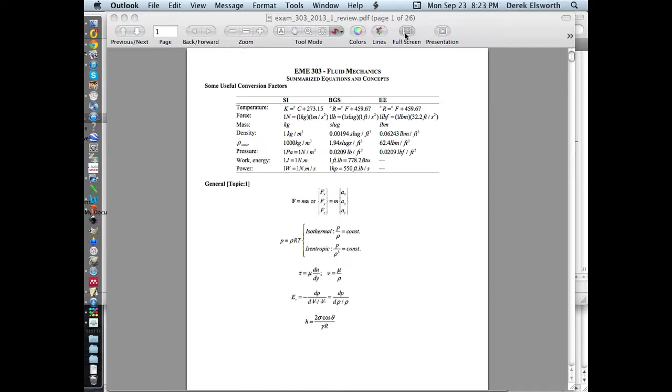Are we given that equation sheet, or do we have to bring our own? No, you're not given any equation sheet. What you need to bring is what you want to bring. So should we have conversion factors on our cheat sheet?

There will be no units other than SI. I would expect that you know this for the exam. So you should know what a Pascal and a meganewton, a Newton per meter squared are. Work energy you don't need to know yet. You should know what density is.

No, I don't think you need conversions. But you should know newtons per meter and how to dimensionalize things like you did in your first chapter, in terms of mass, length, and time units.

The test will all be in SI. Some tests I noticed today have been in English units or BGS. This test will all be in SI. SI only. That's all we've used in class so far. Period.

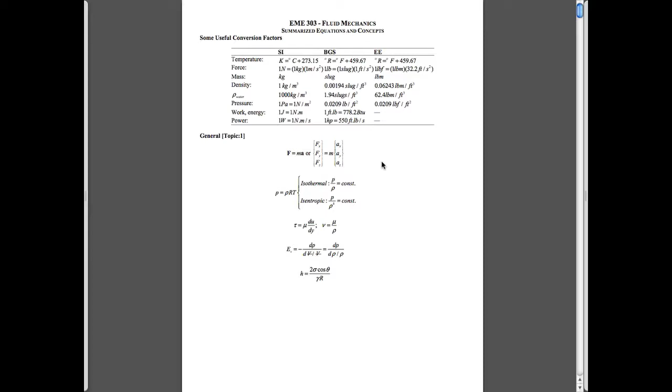So I'm never quite sure how to do this, but I'll go through this. Well, you have all of these. So, in terms of any other questions before we get rolling?

So this is actually marked up from last year. I didn't realize that. I use this program called Skim, which allows me to mark up as we go through. If you store it as a PDF and look at it in a regular PDF viewer, it doesn't actually store the markup, or it doesn't show the markup. But when you show it in Skim again, it shows it.

So these are my markups from a year ago. It's not particularly a specific review sheet to this exam, but it does cover everything, all the concepts you need. They're relatively straightforward. So, ideal gas law, you know in terms of...

gas pressure, temperature, gas constant — this being the specific gas constant for a particular gas, this being the universal gas constant and the molar mass, and this being the density. Density, of course, is mass per unit volume, uppercase M per unit volume, just by definition, which leads to some of our expressions.

Remember always — I can't believe if you're taking thermo now you don't remember — that this is absolute fluid pressure, this is absolute temperature. Otherwise you'll get the results wrong, so you have to remember about doing that.

And if you look at any particular gas, you can merely write this expression as pressure equals density times gas constant times temperature.

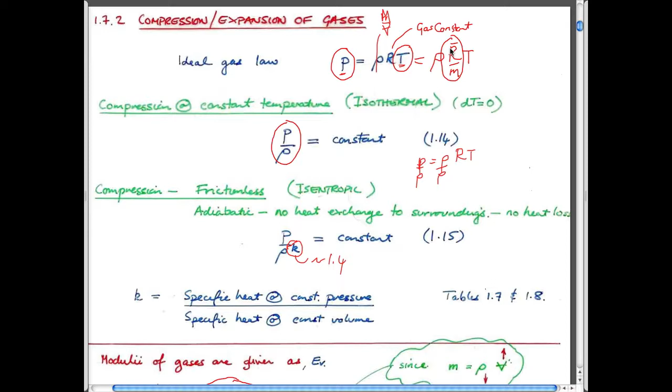Compressibility, well, we used it in a variety of different things. It's really just a term. It's useful to us because we used it in defining acoustic wave speeds, but we haven't really used it for anything other than that.

By definition, it's the change in volume over a unit volume with a change of pressure. The negative sign is just the fact that if you increase the pressure, the volume goes down. So just to keep this constant, a positive unit or a positive dimension, there's a negative in there. It's exactly the same as the change in pressure eliciting a change in density—they're exactly the same expressions.

The compressibility is just the reciprocal of the modulus. It's the same as electrical conductivity being 1 over the reciprocal of resistivity, electrical resistivity. So compressibility, and this is bulk modulus, I guess, as we defined it, if you want terms attached to this.

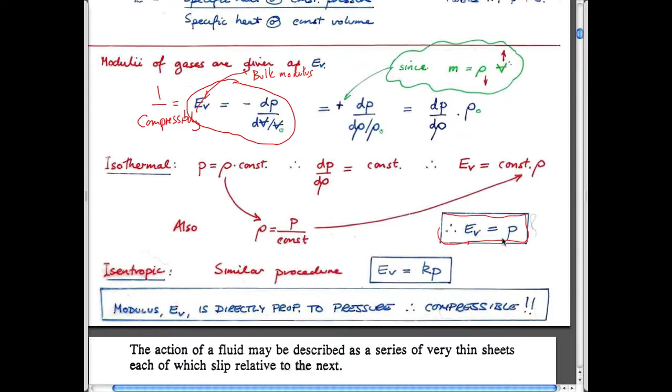A kind of interesting quirk, don't think you need it in the test, but don't turn off: the modulus of a gas at relatively low pressures, actually up to quite high pressures, is equal to the gas pressure. So at 100 kPa that we're sitting at right now, the modulus of air is 100 kPa. So interesting quirk.

So gas law is an important law. You will need gas law, I mentioned that.

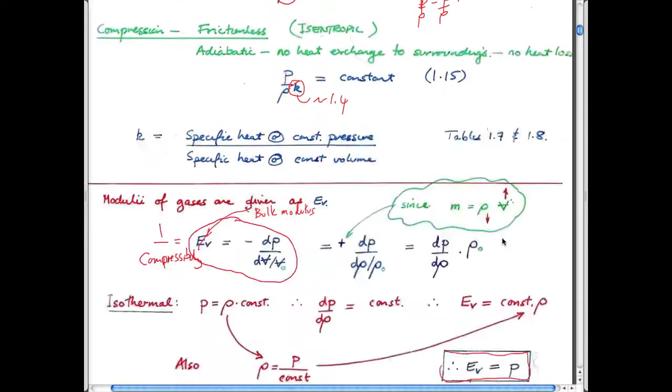Viscosity is a way to be able to relate forces that you apply to bodies that are moving to the velocity at which they're going. I think you've done some examples. It's really just Newton's law of viscosity—it's a straightforward law.

All it says is that the shear stress that you apply in a fluid is equal to some constant, which is the dynamic viscosity, which in SI units has units of Pascal seconds. Shear stress is in pascals.

And the shear stress is proportional to a kind of shearing rate, or a velocity with space. The easiest way to think of this is a derivative, but it's also just the change in velocity as you go from one location to another.

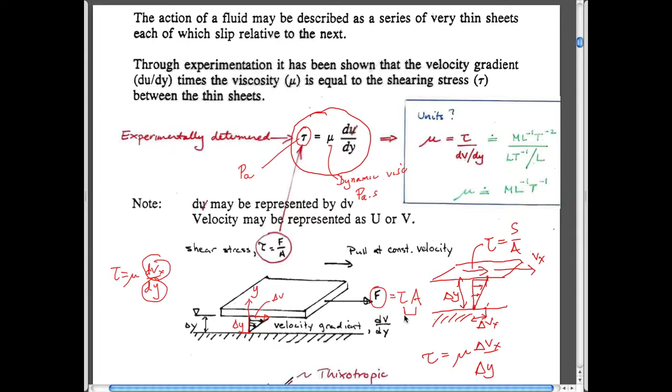And so that's another expression. So: ideal gas law, Newton's law of viscosity. We will only deal in this class with Newtonian fluids, which are these ones here.

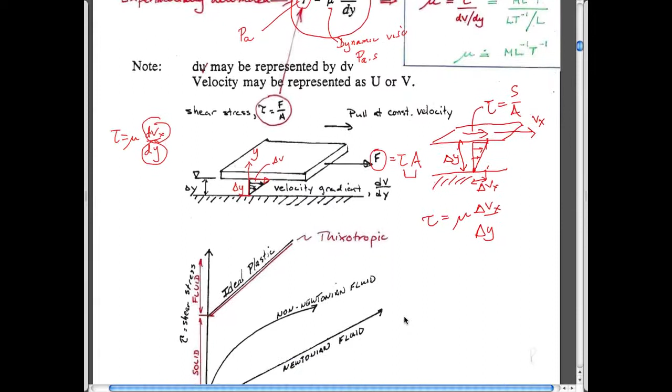Newtonian fluids basically say that if you increase the shear, if you double the shearing rate—so if you start off with a shearing rate of some magnitude, you'll have to apply a specific shear stress to move it, a certain force. If you double that shearing rate, then you have to apply double the force.

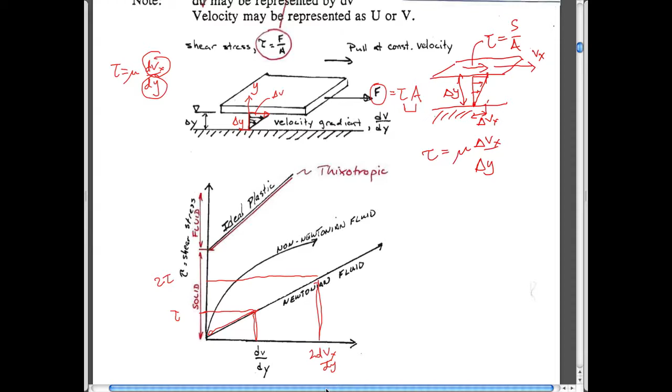That's basically the definition of a Newtonian fluid. So this is 2 dvx/dy—it's just double the amount. So that's the definition of a Newtonian fluid: ideal gas law, Newton's law of viscosity and how to use it, interfacial tension.

That's interesting. So yeah, I didn't know I was so generous. I think that question was actually on the test last year, so you might check that. I'm not sure.

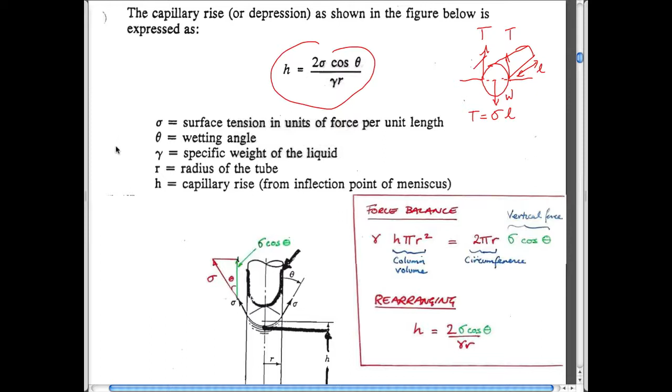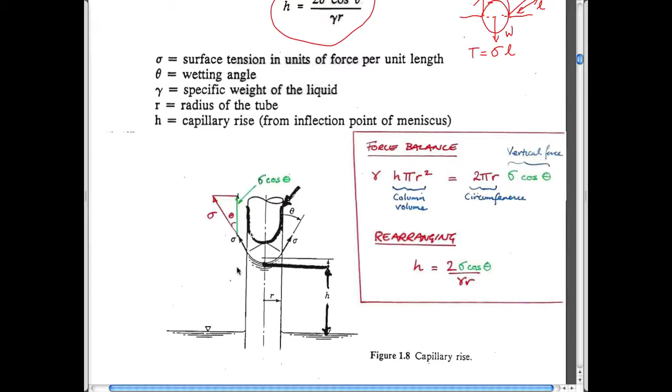Interfacial tension is the third of our major properties that we've dealt with. We looked at the behavior of a capillary and derived an expression related to that. You might have looked at some other ones in your assignments. I can't remember, and I don't really know what your assignments are, so I haven't looked through the book to pull out questions from those. That's just another data point for you, I guess.

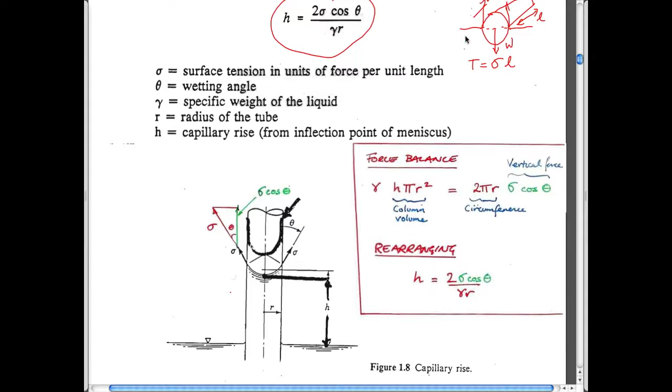If you want to look at the roles of interfacial tension, it's applied where there's a free surface between a liquid and a gas, and also a solid. So either last year or two years ago, the question was: what's the maximum diameter of a needle that can float on water, if it's made of steel, copper, or some other material?

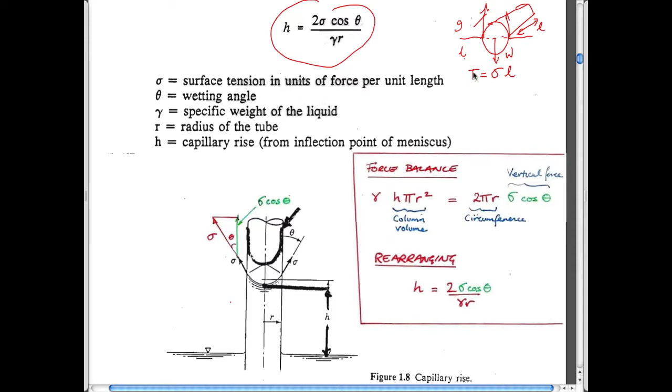You write the free body diagram for it, which gives the forces acting upward, in this case T and T on each side. They're applied along the length, so this is newtons per meter, and the length is in meters, so in terms of units this is newtons. There's two of them acting upward, and the only component acting down is the weight of the solid. The question said to ignore buoyancy, so you don't have to worry about half of it being submerged.

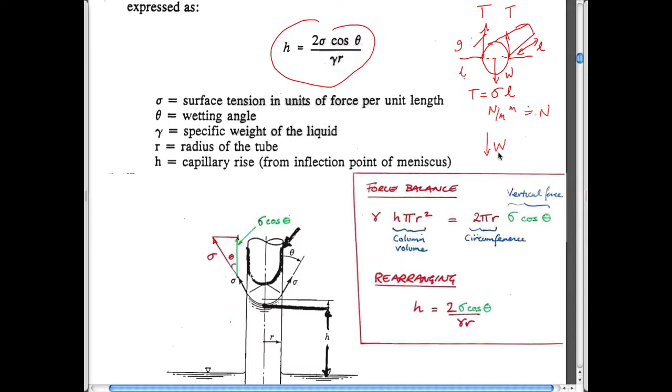We did an example for a capillary tube, basically the same idea. We wanted to cut this off at this point here. The reason we can do that, even though we haven't defined it yet, is that if you can go from one point to another in the fluid at exactly the same elevation along that pathway, then the pressure here has to equal the pressure here, by definition.

So you can just cut the tube off at the bottom and do a nice free body diagram to calculate the behavior. The idea is the weight of this, which is volume times unit weight of the fluid, balances the forces pulling up, which equal interfacial tension times circumference. You can check that each of these are forces, balance them against each other, and define the behavior in terms of this particular radius or diameter. Straightforward - well, straightforward to me.

Typically you could think of this axis as an angle, but the simplest case is if it's parallel to the glass you have, which is much easier. This expression is exactly what comes out of that, and if theta equals 0, this term just equals 1 and drops out. So we have a relationship between height rise and interfacial tension, which we talked about in class: interfacial tension is higher, it rises higher; radius of the tube gets smaller, it rises higher. All things you kind of know intuitively, but now with numbers on it.

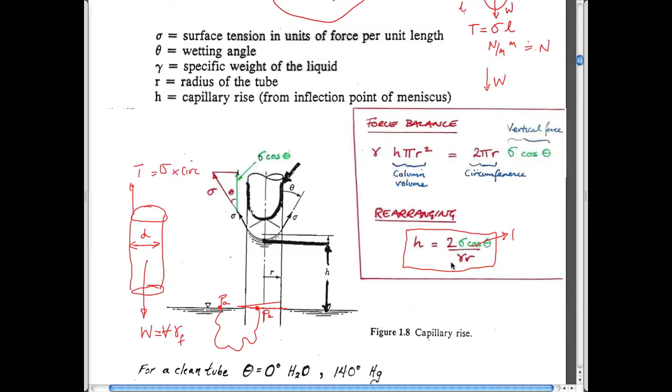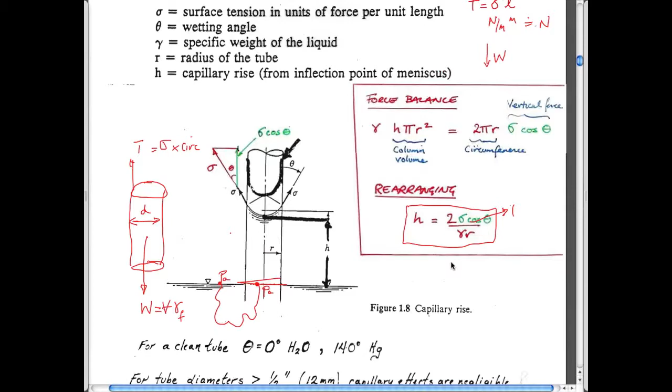Okay, so a question on fluid properties - those are the principal fluid properties, I think: ideal gas law, viscosity, and interfacial tension. So know how to use those. I won't go through these now because we'll cover them when we talk about things.

Yeah, I apologize for having these scribbles on here. I didn't choose that, but this is the first time I opened it up. So remember the fact that we always choose our positive z direction upwards.

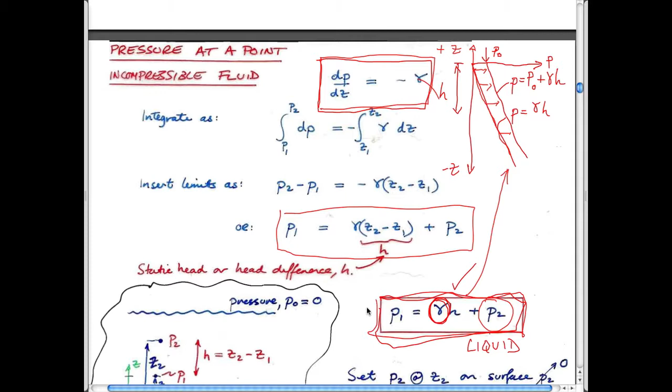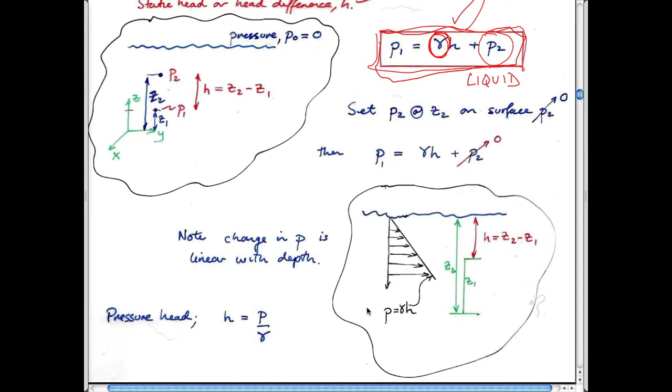I think if you've got this far in your homework assignments, you certainly know how to do that. Everyone okay? It gets a bit more complicated when you deal with gases.

There isn't a question for which you need this page of formula, I don't think. So don't switch off, though. We made the point that this expression is valid everywhere, always, liquids or gases. But for gases, because this isn't constant, it changes.

Unit weight, of course, is equal to density times gravity. And density is a function of pressure. Not trying to confuse you, this just means it's a function of pressure.

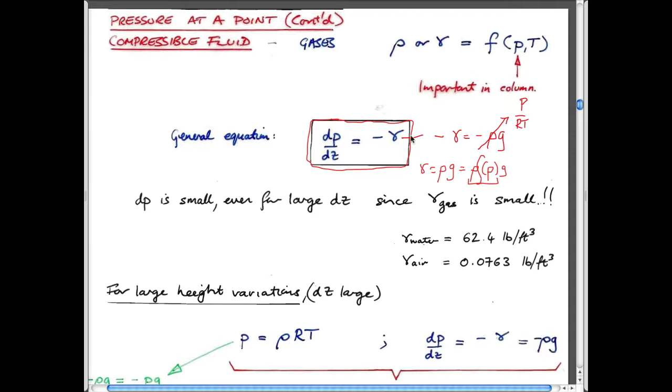Because this changes with pressure, if you go up in the atmosphere, you have to do some manipulation to it, and we did that manipulation, and we came up with an expression which I think you needed to use last time. If you check your last year's...

I have a question. Yeah, okay, I'm listening. Is there any chance at some point we can go through or look over exam problems or stuff like that? We can do, yeah. I'll do it after this. I'll go through exam problems if you want, if you pick them out and ask. I'm not going to go through the exam problems we have, but if you have some ones you want to go through, I'll do that. Okay.

You just need to wait till we got through this part. So you don't need to know the stuff for pressure changes in a gas.

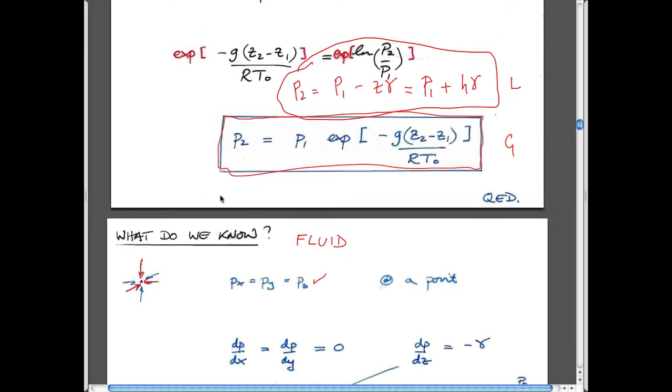So if we summarize behavior for liquids, we know that pressures act in the same direction at a point, and same magnitudes in all directions at a point. If you go horizontally, this is how we were able to calculate the changes in pressures as we go across, in the capillary tube. This is exactly the expression that we used.

If you go horizontally, there's no change in pressure, so the pressure inside the bottom of the capillary tube is exactly the same as the atmospheric pressure outside. We've already talked about this, so you have that.

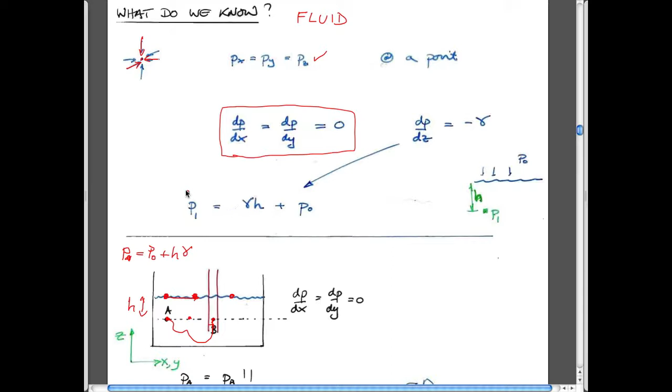You know that every point within a horizontal line within a fluid is the same pressure. So in here it has to be atmospheric. Here it has to be atmospheric plus the unit weight times the height.

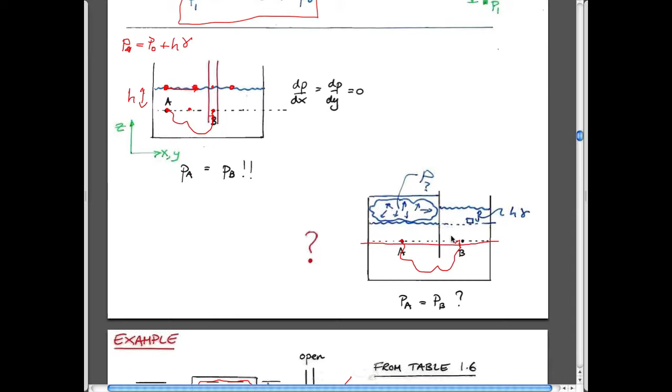You can do exactly the same in here, and that's what manometer equations are all about, being able to work your way from something that you know, which is atmospheric here, to a pressure which is larger than that, going from this to this elevation, and then being able to calculate what this is just by subtracting those off. So that's really all manometry is all about.

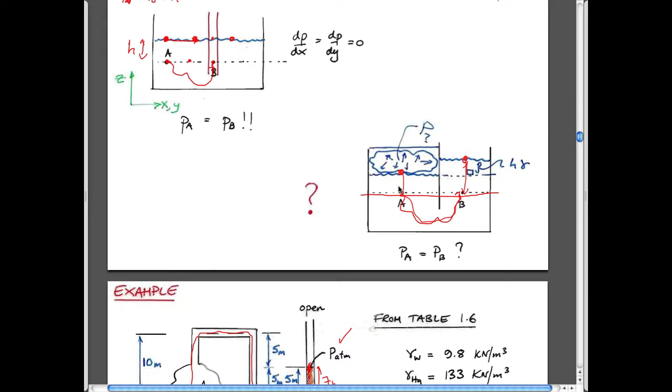You'll remember the manometer rules. They're written here: if you go up in a fluid, you subtract.

If you go down in a fluid, you add, and you just work from one location all the way to a location that you know. So for instance, if you want to know the value here, A, you could just scoot straight across here. You know that pressure here is the same as pressure A. You subtract 2 meters times the density of this water to get to this point, add 7 meters to get to this point, and that should equal the atmospheric pressure. You just have to keep account of the fluids that you're in. If you're in a liquid, you probably have to account for the unit weight. If you're in a gas, you probably don't, if there are other liquids involved, because the density of gases may be on the order of 1,000 times less.

In the book, we had problems that had manometers on an angle. Yeah, but we haven't done one of those in homework. Should we be concerned with going over those, or are we looking at purely vertical, doing that type of thing? We did one in class. Yeah, and there was one on the homework, but it said disregard the angle. Yeah, I think anything we've done in class is fair game. So there's not necessarily a differential manometer question, though.

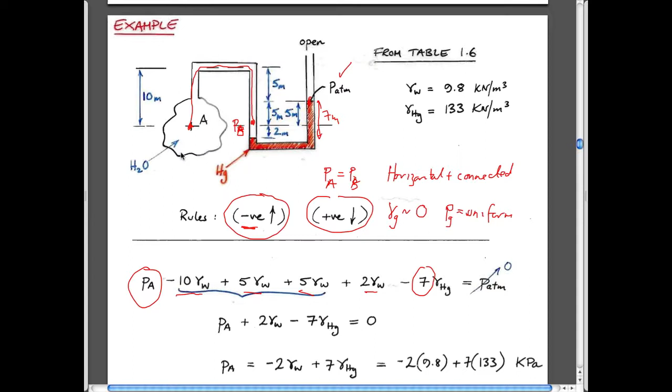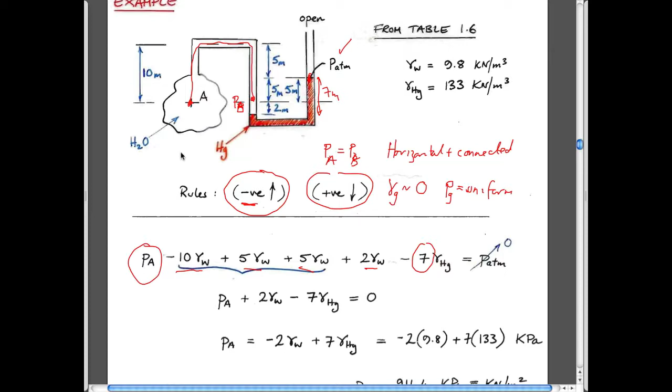Okay, so go up, you subtract. Go down, you add pressures. If you go up in a gas, then maybe you can neglect the magnitudes of the unit weight. I'll be happy to go through some questions, exam questions, or whatever other questions you want to do after the fact.

So one of the reasons that we want to get fluid pressures at a point is because we also want to be able to say something about fluid pressures on structures. And if you remember when we talked about that, there were 3 key components. The first is that if you want to get the fluid pressure, the force that acts on a structure, we need to find the resultant. If you want to find the resultant, you can always get it by calculating the magnitude of the depth of the centroid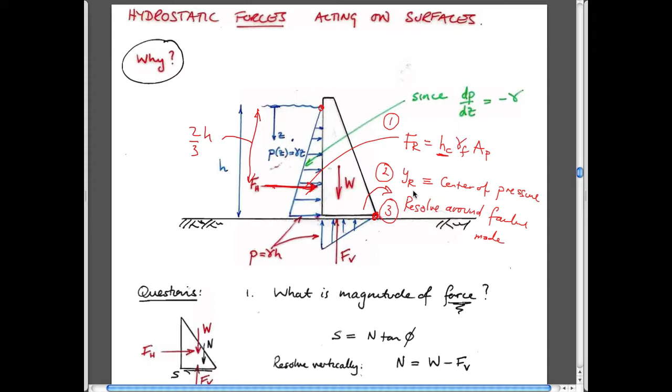And then if you want to see how something fails, we'll come back to number 2 in a second. If you want to see how something fails, then you have to resolve around a failure mode. So once you have all the forces that are acting, you know where they act. To know whether it falls over or not, you have to choose a way it'll fail. So there's a pivot or a hinge or a way of moving. You need to be able to define that. And we've talked about that in a number of examples, and we can go through one if you so wish.

The magnitudes of the forces, again, if you have a plate and you know where the centroid of that plate is, and you know the depth of that centroid from the surface vertically, you have HC. So the plate doesn't have to intersect the surface. It can intersect the surface, in which case it should just be the wetted portion of the plate. But it doesn't have to intersect the surface. The area speaks for itself, and the unit weight of the fluid. It doesn't matter if it's flat. For instance, if you have fluid up here and a plate down here, the depth to the centroid of that plate is the same distance whether the plate is flat or inclined.

The forces acting on that plate would be exactly the same through all angles of inclination, because as you can see from this expression, the distribution of pressures decreases above this point and increases below it, but on aggregate they're equal to the average amount. You have an inclined plate below the surface of the water, and the fluid pressures acting on it would have some distribution equal to this.

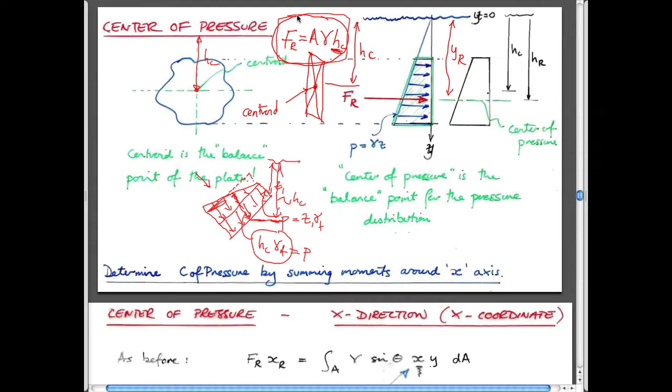And it's calculating the distribution equal to this area, this fluid pressure, which equals unit weight times HC. So this fluid pressure here would be HC times the unit weight of the fluid, and therefore the total force acting is just the product of those two — the pressure multiplied by the area. So it's no different from this. I'm not trying to confuse you, I'm just trying to give you some insight into what's going on, because I think that's what you need to gather.

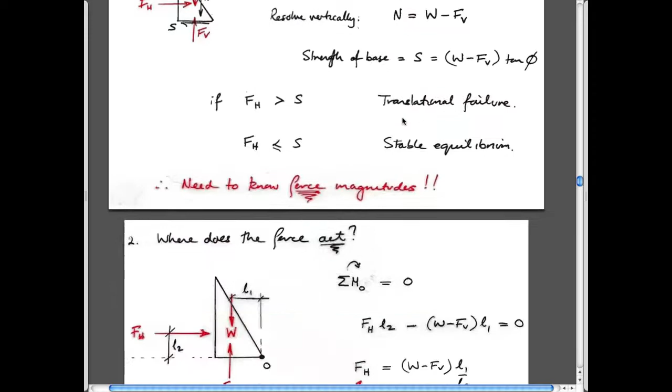So you can always get the fluid pressure from this simple expression, always, on a plane surface. If you want to know the location where it acts, you need to know something about the center of pressure, and you can use these stock expressions. The important thing to remember is that this is the vertical depth to the centroid of the plate from the surface — vertical depth, always.

This is the in-plane length from the surface to the centroid of the plane. Physically, this expression means the point at which the force acts will be at the centroid of the plane plus some small amount. That small amount is because this pressure distribution weights the larger pressure below that point relative to the lower pressure due to the sloping distribution above it.

As you can imagine, if you look at a vertical pressure distribution, and for instance a plate that sits here, then the location where the resultant acts is going to be two-thirds of this direction down, just from what we know — a third up from the bottom.

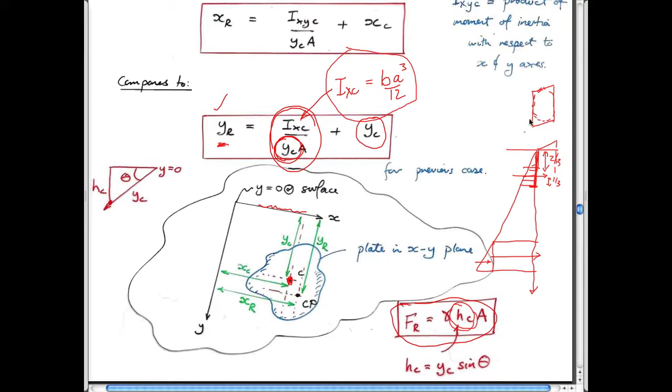Everything we've talked about is only for plates, for flat surfaces. Moments of inertia we've talked about in class. I don't want to complicate matters by saying that the point of action is actually the balance point of the pressure distribution, which we've said a number of times in class, but that might just confuse matters.

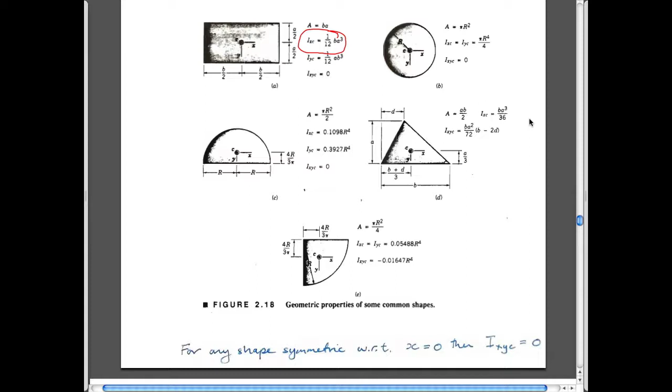Everyone okay still?

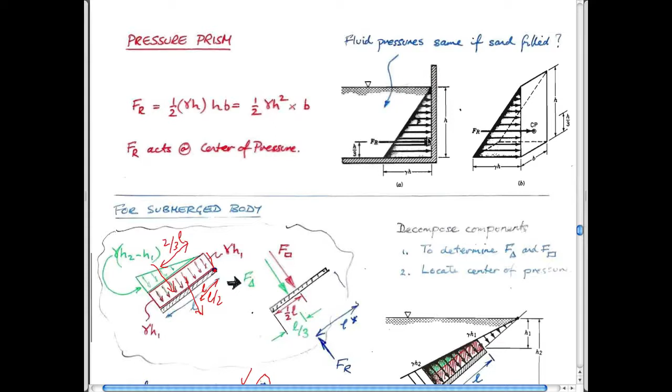Fluid pressures against structures - you can get it just by using this for a plate that intersects the surface. It's going to be equal to two-thirds down, a third up from the bottom. We always know that. You can always do a simple sum of moments to be able to do it for any body that, for instance, doesn't go from the surface.

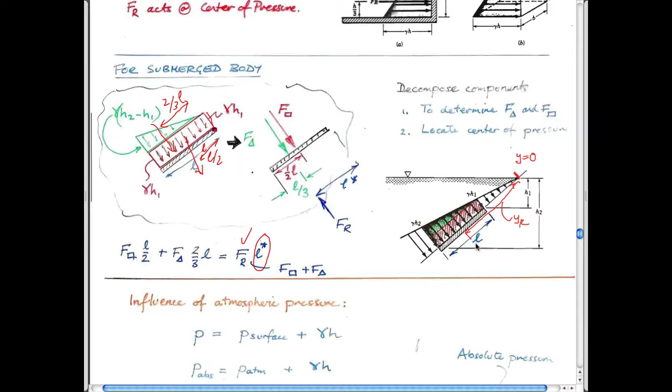For instance, if you wanted to solve out the location where this acts, you could choose this as your origin here as y equals 0, and calculate from that formula the magnitude of y sub r. If you use that appropriate expression for this plate, you'd get the right value of y sub r, so you'd get the right location where this force acts, the force being given by this magnitude, but it acts at this particular location.

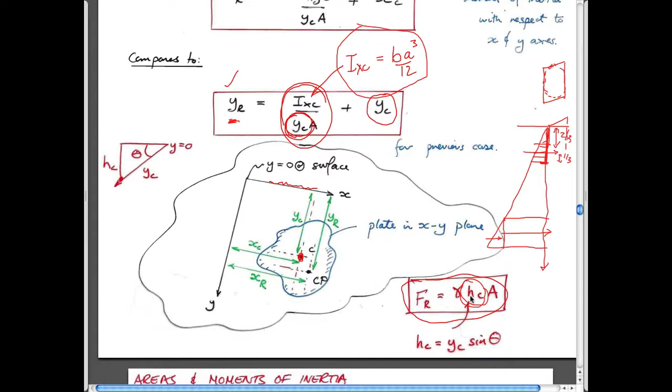So you can certainly get that by using that expression. The other way you can do it is just by taking moments around some arbitrary location.

You have this uniform distribution, and you know that the force acts halfway along it. So if you take the total magnitude of this force and multiply it by L over 2, and add to that the total amount of this green force, multiplied by a lever arm of 2L over 3, which is the lever arm for this, and provide a force acting backwards which has some location that you don't know, then you can solve for this because you know that the resultant is just equal to the sum of these two distributions - F triangle plus F square.

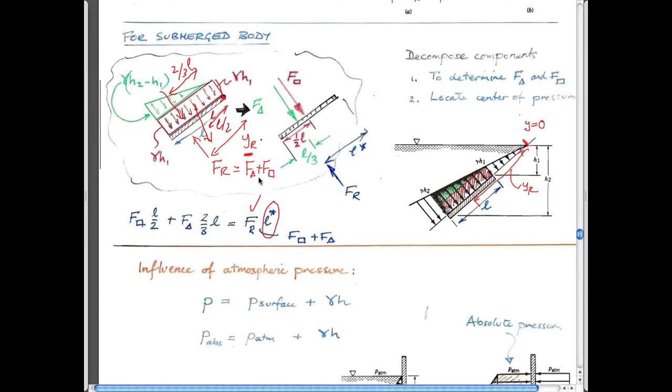Okay? So you can take those. So remember the three things, right?

The force acting, the resultant, is always the depth of the centroid of the plate multiplied by unit weight of the fluid and the area. The location where it acts is always Y_R. The depth of the centroid, H_C, is this vertical distance. The distance to the centroid is the in-plane distance from the surface of the water. Once you know where all the forces act, if you want to know whether this hinge can go, you actually have to resolve around the particular location that's going to define whether it fails or not. So those are the three cardinal rules for dealing with this.

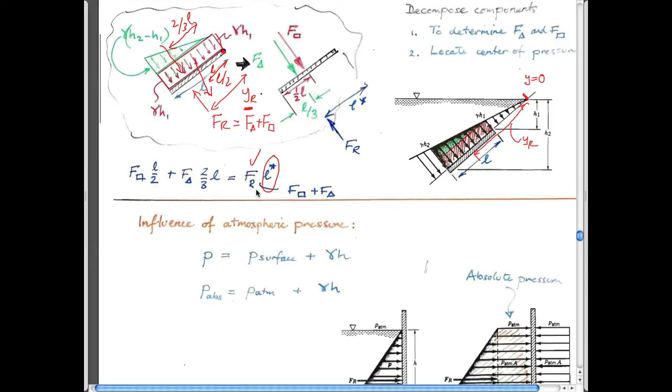So this is just an alternative - the same way as using Y sub R.

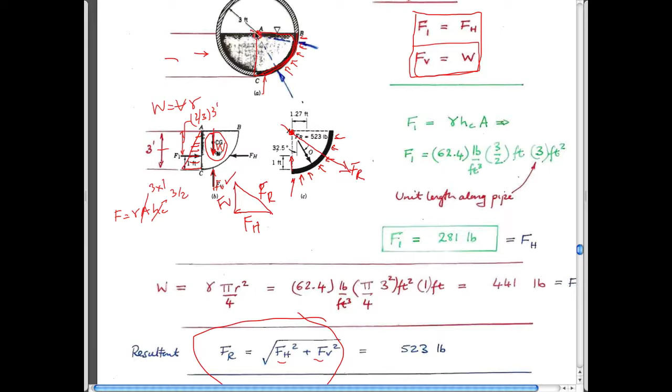And the unit weight is the unit weight of fluid. If you want to, you can resolve forces since you know the magnitudes of both the vertical and the horizontal forces. So if you just use Pythagoras, you can get the magnitude of the resultant for each of those, if you so wish. And in this particular case, because all of the forces are acting perpendicular to this, the fluid pressure is acting here all perpendicular to this, they all physically act through this point. So you know that the resultant would act through this point as well, if you needed it. And so you can calculate that.

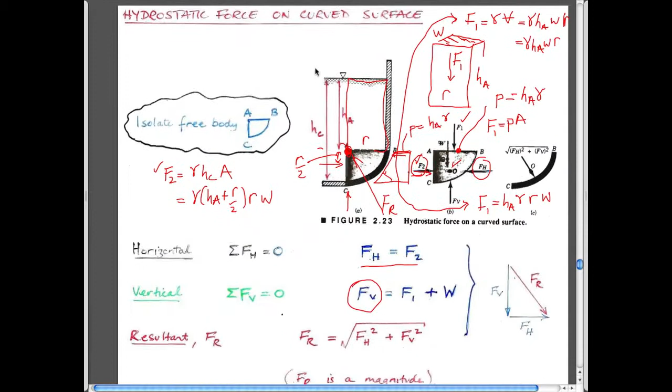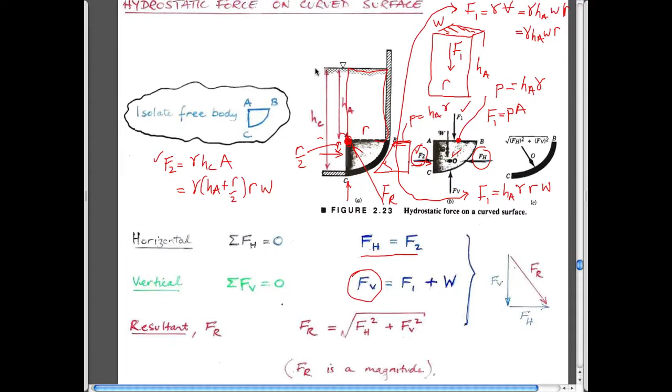If fluid pressures, if a container is filled with something that's not a liquid but a gas, for instance, then you might be able to neglect the unit weight. For instance, if this was capped off with a lid, and instead of having liquid in here, then what would be the pressure distribution acting on this? Well, certainly in a liquid, the pressure distribution would vary linearly. In a gas, the pressure distribution would be much closer to this. It has a very small gradient, right? So this is water, then this would be a factor of 1,000. If this was air, then this would be a factor of 1, just the difference in densities of the two.

And so in some cases when you're dealing with gases rather than liquids in the system, you can actually consider that the pressure doesn't change markedly with depth, in which case it simplifies your calculations a fair bit. So I won't go through this one.

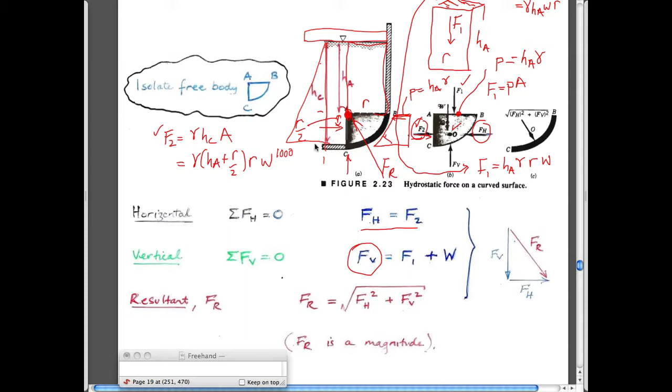All right, I went through this in class as well. I don't know if you want me to go through that. I think you can look up the video. I think the key point in many of these situations is that you can draw any kind of free body you want, and you can divide that free body to look at the system in any way you wish. And so you can draw this basically as a free body on which you have fluid pressures acting.

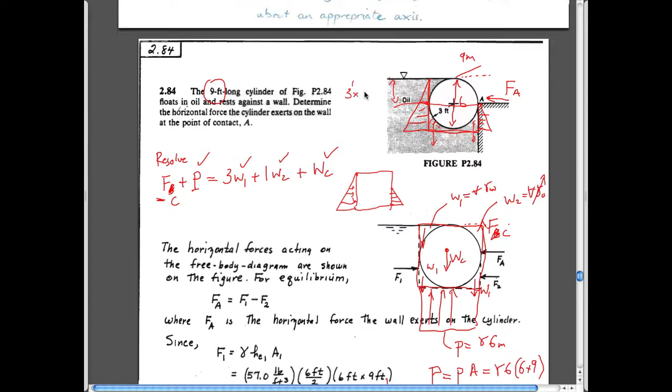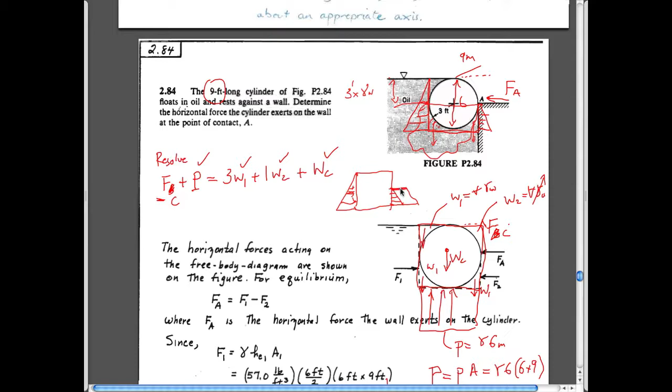But of course it can't, right? Because we know that if you can go from any single point, such as here, you know that the fluid pressure at that point is equal to 3 feet times the unit weight of water. And since you can go from this point in a connected path all the way to this point, then the fluid pressure here can't be atmospheric. It actually has to be exactly the same pressure as this point. And so the fluid pressure distribution there would be this magnitude, because this fluid pressure has to be that. Okay? So I think that's the trick from that example.

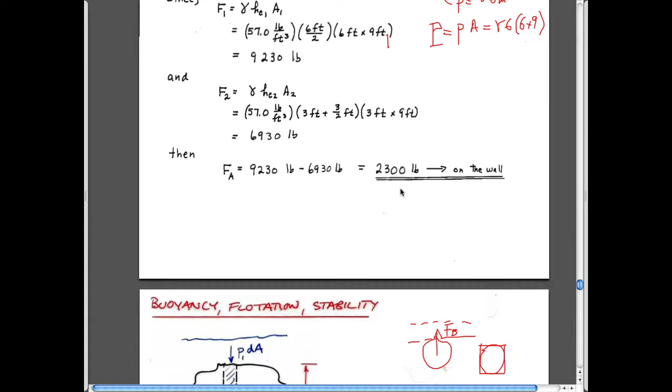All right, so fluid pressures on structures. Get the fluid pressure to point to get the magnitude of the resultant, get the force, which is equal to the depth of the centroid, unit weight times area. Get the location. You could either resolve around points, or you can use the second moment of inertia expression to do that. And once you have those forces and know where they act, resolve around the force. I'll be happy to go through an example of your choice afterwards, if you so wish.

Buoyancy. The buoyant force that's applied on any structure is just the displaced volume of fluid multiplied by the unit weight of the fluid that's displaced.

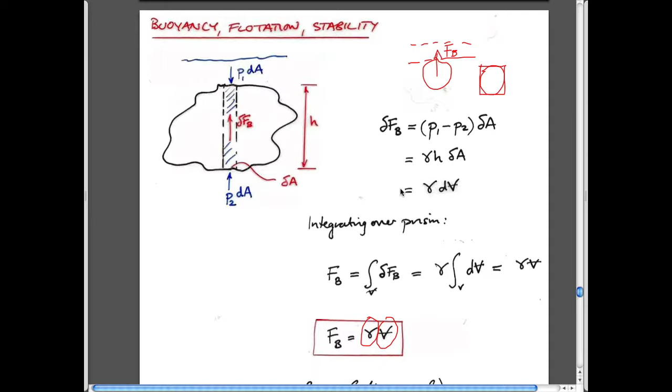It's entirely general. It doesn't matter what the shape of it is. So this expression is merely the expression that we have here.

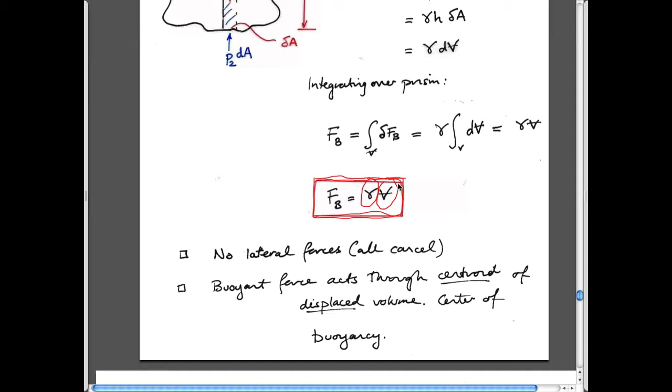If you look at previous exams when we've had balloon questions, for instance, we've talked about those because we've had those in class, and so we haven't really talked about that so much. So you can gauge what might be fair game on this exam. I'm not trying to trick anybody, by the way, in case you're concerned.

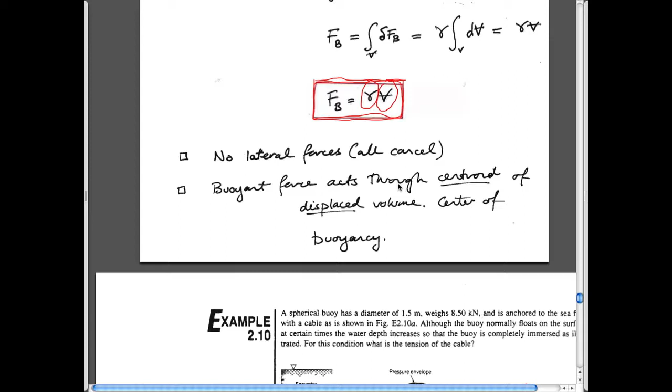So prior exams might have been favored because we talked about some certain things in class which we haven't necessarily done now. But buoyant force is always equal to the unit weight times the volume that's displaced. You can always resolve things in terms of a free body.

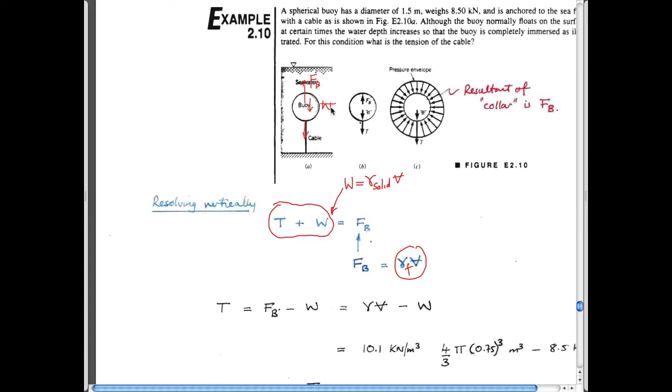In this particular case, it would be a tension acting downwards, a buoyant force acting upwards, and any weight of this component which is acting downwards as well. You can resolve those to be able to calculate tensions in cables and things as you've been asked to do in the past. And so that's the other wrinkle, I guess, on fluid pressures on structures.

And of course, buoyancy really is just an excess fluid pressure on a structure, as is kind of illustrated here. So in other words, if you take this, instead of thinking of it as a buoy, which is circular, and if you look at how fluid pressure changes with depth, the reason for buoyancy is just the fact that as you go down at depth, you have a certain force acting on here, which is equal to the pressure that's acting on this top surface. You have a larger pressure acting here because you're at a deeper depth.

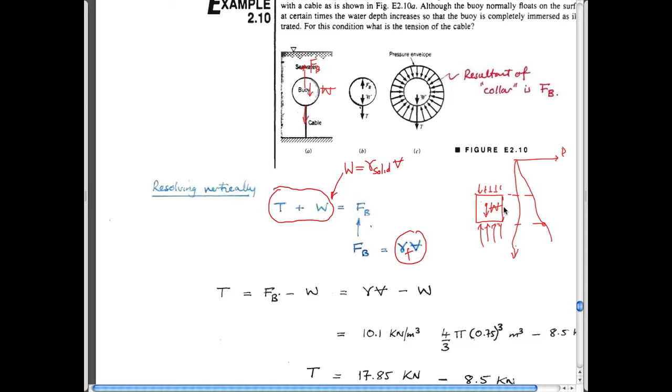And the reason that happens is because you've got the weight of the fluid in here that balances that. If you take that weight of fluid out, then all of a sudden you don't have that vertical reaction, and therefore it wants to float up like a balloon or a football coming out of the water. So the rationale for it is simply that.

And of course, the other thing that we've mentioned is that if you look at, for instance, changing the fluid pressure, because you're changing the fluid pressure on the top of this by some extra small amount here, and you're changing the fluid pressure on the bottom by some extra small amount here, changing the fluid pressure doesn't change the buoyancy in any way, because you're merely just incrementing the fluid pressure above it and below it by the same amount, so they both cancel out.

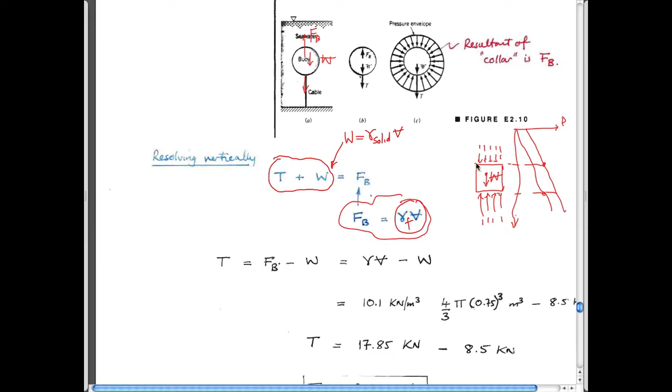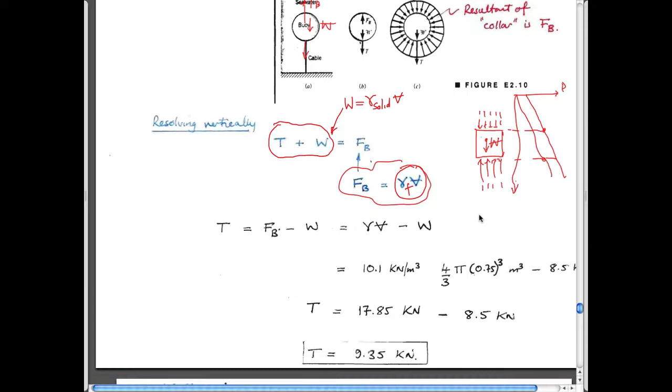So buoyancy doesn't care about anything about the fluid pressures that are applied in the tank or anything else related to that. It's just the unit weight multiplied by the volume of that fluid that's displaced.

Okay. Talked about linear motions. Again, apologies for scribbles. What are the key points in looking at this?

I guess there were two kind of standard results that we had. The first standard result is what happens if you accelerate something with a free surface. What happens to the inclination of that free surface? And just from taking a glass, you can imagine as you accelerate it, not with constant velocity, but as you accelerate it, it should incline.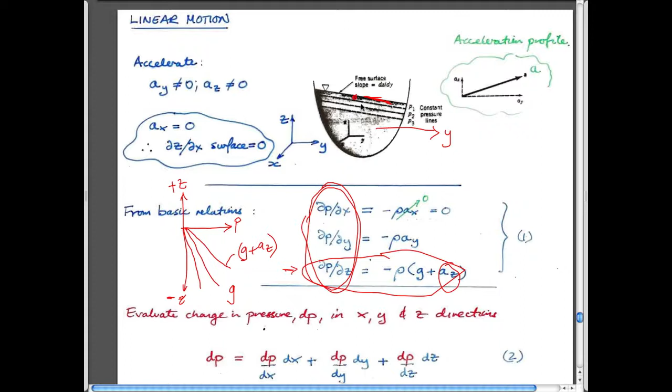And we can basically develop an expression. You won't have to develop this expression, but the expression to get the change in elevation of the surface of a fluid as you accelerate it would be something like this. So this is a fluid that you have in a beaker. Acceleration in the y direction is the horizontal direction. Acceleration in the z direction is vertically upwards, again because we have our coordinate system which is positive upwards.

And so as a result of that, you can get the inclination of the free surface that would act as a function of that. Gravity always acts. If you don't accelerate it upwards but just accelerate it horizontally, then this term would be 0 and this would be something. And so you can use that, for instance, to be able to calculate the inclination of a meniscus.

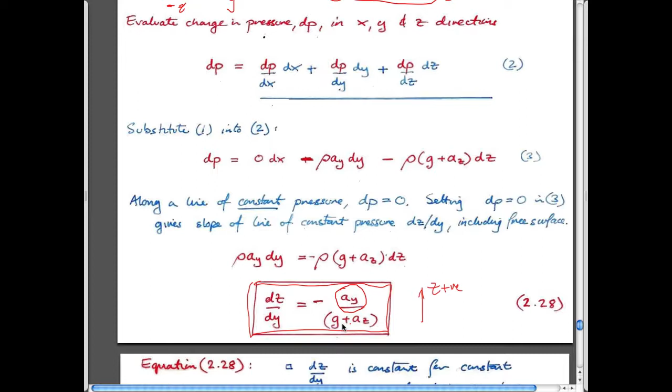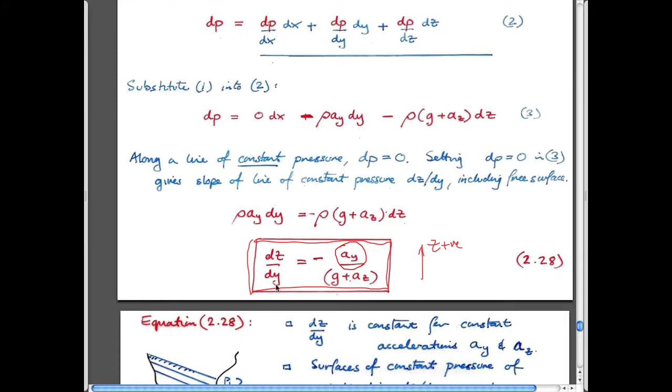We did it for a bus going down the road in class, right? To be able to figure out what the acceleration of a bus was, just from looking at this expression. The other way to think about this, so we can come up with something that says something about the inclination of a free surface, and there certainly have been questions on that in the past.

The other question is, what happens if you're sitting in this fluid, which maybe has a free surface, and you go down in it from the surface? The question is, how does fluid pressure change as a function of depth? We know that pressure is equal to unit weight times the depth below. That's our normal expression as we write it.

If you wanted to figure out how pressure changes with elevation as a function not only of unit weight, this is the same as writing minus unit weight, minus density of the fluid times acceleration in the z direction. Since this is additive, you could write this most easily this way. This is the term here that contributes to it.

If you're going upwards, accelerating upwards, you add some increment to this, and the fluid pressure that results would be affected if you accelerate upwards at some acceleration in the z direction. This is if the acceleration in the z direction is negative, so this would be negative. It's the kind of thing you feel in an elevator.

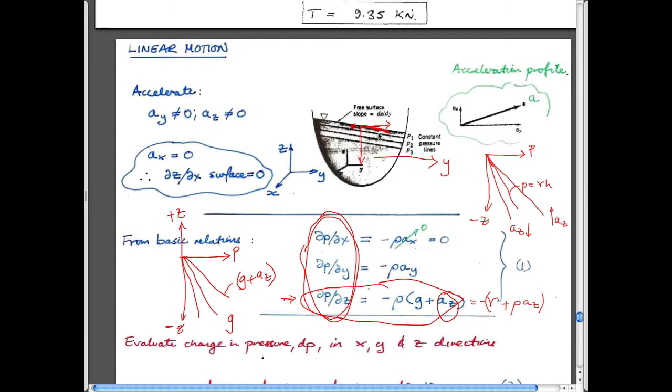We dealt with linear accelerations, in other words moving horizontally and vertically, or both at the same time. So we can say something about the inclination of a free surface and also how pressure changes as you go down in the fluid. We also talked about rigid body rotation, which is basically that behavior.

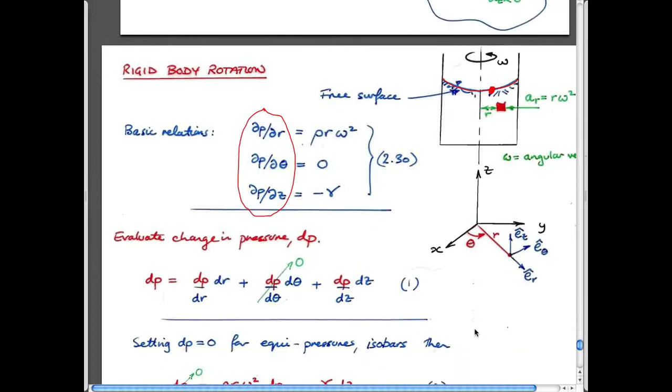We also talked about rigid body rotation, fluids that turn at constant velocity but are changing direction. If you look at the fluid in plan view on the outside of this container as it goes around, the fluid wants to go straight in this direction at v theta, but because it's constrained by the tether or the container, it goes around at some other angle. So it's going at the same speed, but changing direction, and therefore its velocity is changing. If its velocity is changing, it's accelerating, because it's changing direction merely by virtue of that.

So this is turning at constant rotational speed. Omega is in radians per second. Revolutions per second are equal to 2 pi radians per second, so there's a conversion there.

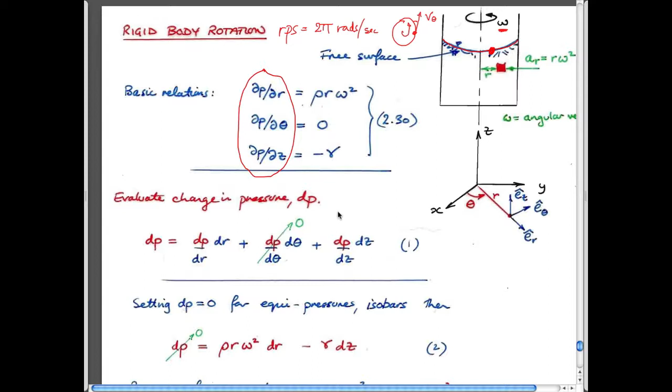What you can do is exactly the same as we did for horizontal accelerating fluids. You can either say something about the inclination of the surface if it's an open container, or about the fluid pressure at an end point, just by doing the same things as before. To get the expression for the elevation of a surface in the container, it's given by this expression. The elevation increases as you go radially outwards. As you double the rotational velocity, you quadruple the potential elevation, etc.

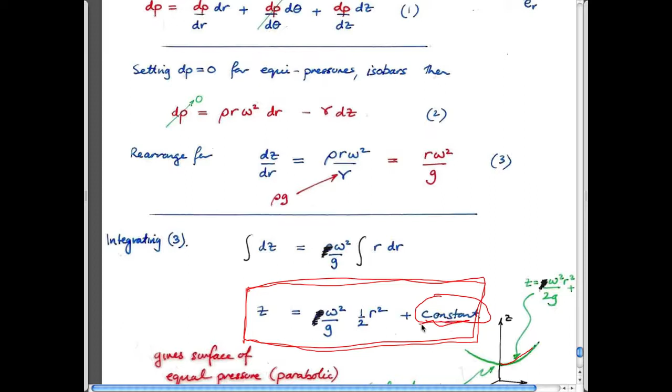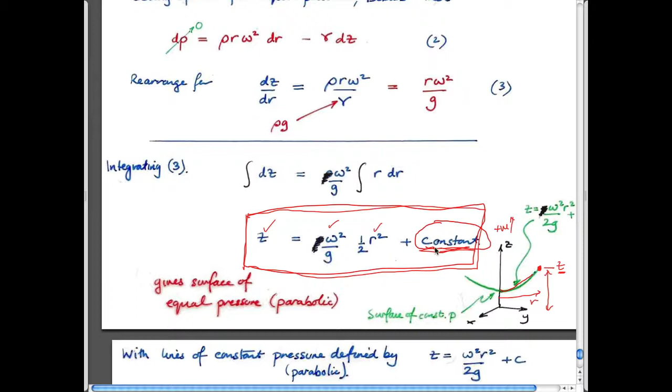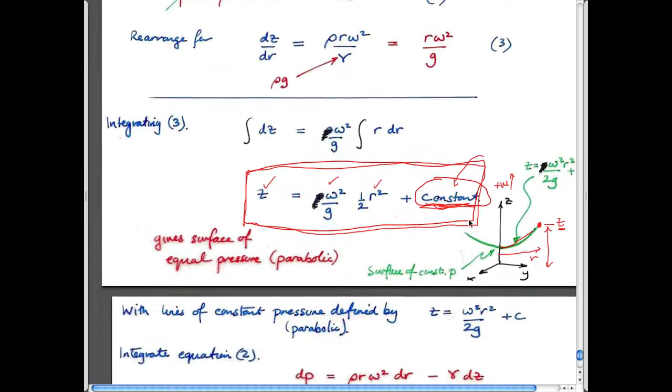This has a constant in it, so in the example we did in class, we calculated the behavior for a meniscus where we know the value of this elevation, again positive upwards. You need the value of a portion of this free surface at some location, at some radius. If you know the radius where the elevation is, at some particular rotational velocity, and on some planet, you can calculate what the constant is. Once you know the constant, you can put it back into this expression and solve for any system involving that. That's worthwhile knowing, and we did an example in class that does exactly that.

Likewise, you can do the same thing to get the fluid pressures at some point. Define the behavior in terms of some location where you know the fluid pressure, choosing a place where you know the pressure at a particular elevation, radius, and rotational speed. If you know that, you have a value for the constant, and once you know the constant, you can substitute it back into the expression and solve for any system. We did an example in class like that.